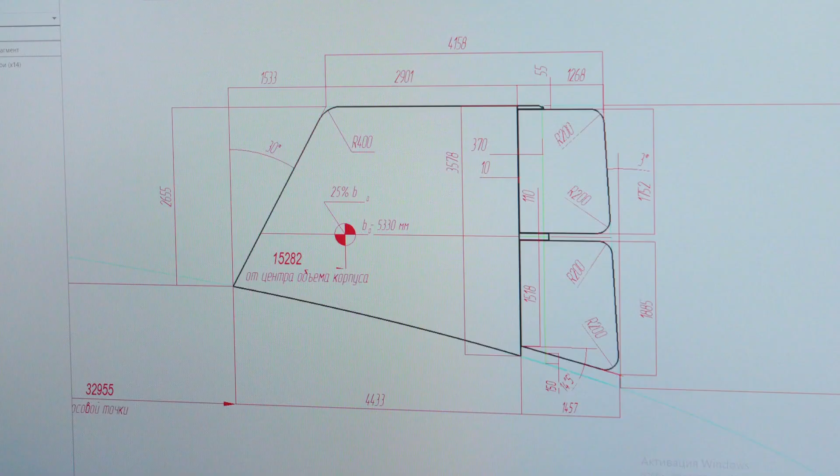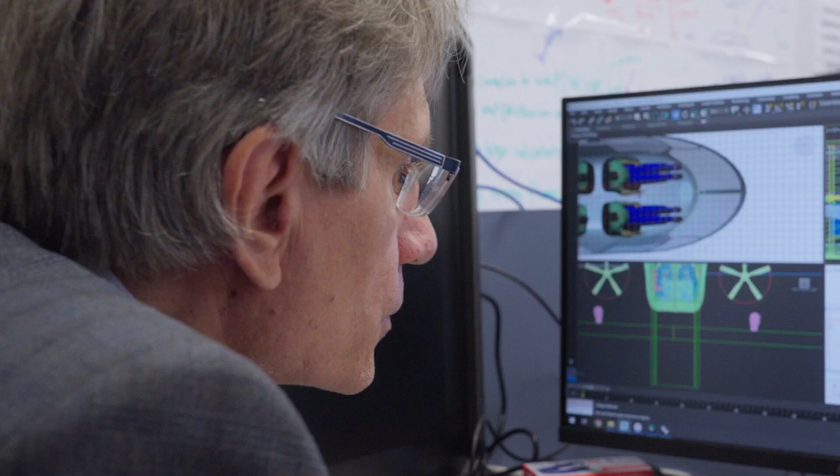Its main purpose is tourism, specifically sightseeing tours from the air. This could be of interest to investors. They can come, see it for themselves, and even try flying as passengers on this craft.

And in the unmanned version, it will be built as a prototype of a cargo airship, on which we want to work out the main issues related to cargo transportation. It will be designed to carry 500 kilograms of cargo over a distance of 500 kilometers. It will be possible to practice all the main operations necessary for this: mooring to a load docking mast, unloading, loading, takeoff, automatic takeoff, and automatic docking.

We are already starting to test all these operations on the unmanned vehicle, and then all the experience gained in the control system, how it will be implemented, will be transferred to the Nova 2 airship. The most labor-intensive part, the most important part from a design perspective, is the gondolas. We have finally settled on the basic dimensions, passenger seating, and the placement of doors and window openings. We are modeling all of this on a mock-up.

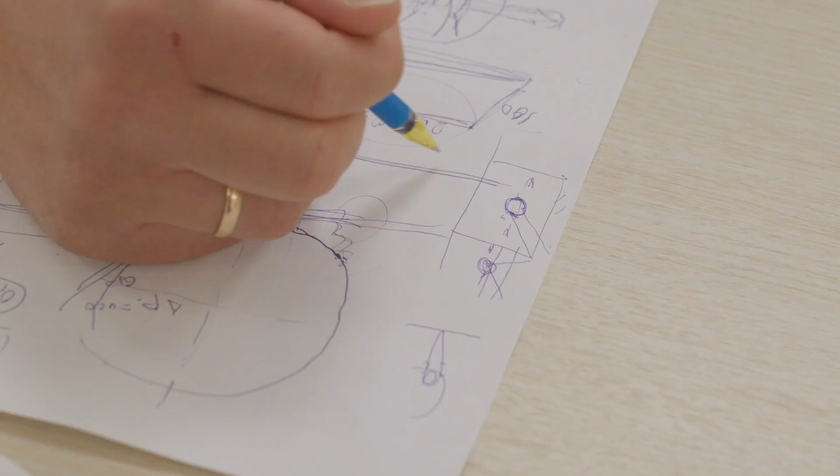Then, for a more thorough study of issues related to ergonomics, we will make a gondola mock-up that will be even closer to the real apparatus. At the same time, work is underway on the design, that is, its development, installing the engines, and selecting the materials it will be made from. We plan to actually start manufacturing this gondola physically around the end of summer.

Work on the envelope is also progressing in parallel. The material for the envelope has been purchased. Welding equipment and cutting equipment have also been acquired. In other words, this envelope will be produced right here at our own facility. And the other parts of the airship are also being developed: the empennage, the aft steering device, and the power supply system, because it's quite complex.

We have a lot of powerful electrical consumers. There will be 2 networks on board, a 12-volt and a 48-volt system. Work on the VGS units is also ongoing in parallel. And of course, we're waiting for the engine to be on the test stand so we can start it up and see how it performs.

We have a rather complex transmission system there. From a single engine to a gearbox and angular gearboxes, we distribute the torque to 2 propellers. The propellers themselves are not simple either. They are ring propulsors, which allow us to generate lift while stationary, making takeoff and landing of the airship much easier.

The Nova 2 airship will be another milestone in the development of Aeronova's aeronautical technology, because it's the first manned craft that we will get airborne. This is a step towards creating larger airships, both the Nova 8, which will have 19 seats, and the Nova 35, which will have a rigid frame. So we're moving in that direction, towards building big, beautiful airships.

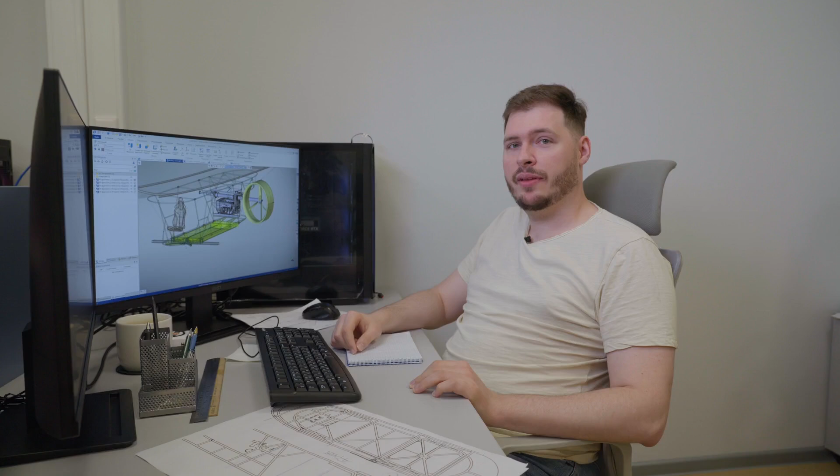My name is Dimitri. I'm a design engineer at Aeronova. I'm working on the Nova 2 project. I'm assembling the overall look of the gondola, meaning I'm putting all the models together. This is very important work. I'm also working on designing the suspension system that connects the gondola to the envelope.

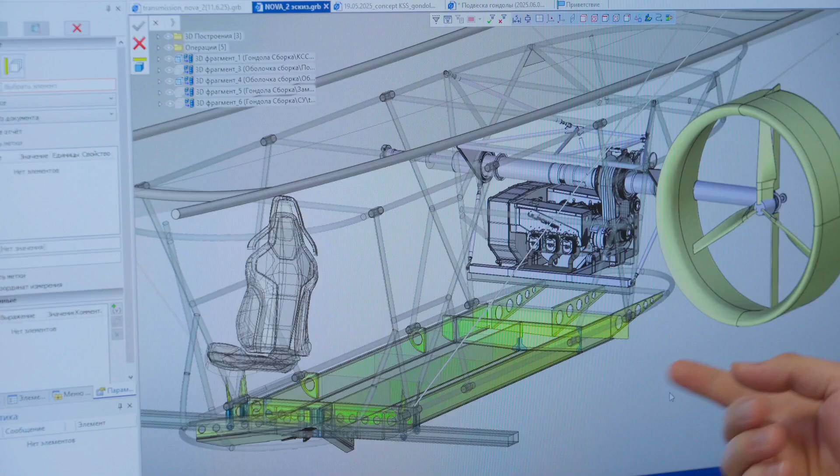Right now, we're developing the structural layout of our gondola. This is the gondola's load-bearing frame. It's made from aluminum profiles. Simply put, this is the skeleton of the gondola. We're laying out the ribs and considering where all the different structural elements will go. Here, in fact, is the engine placement.

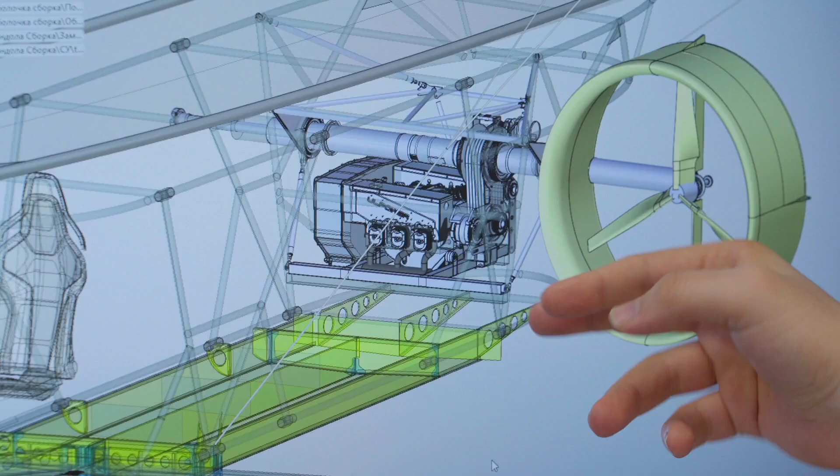There will be more seats in front of it, a whole row of seats. And because of that, we need to figure out if we'll be able to reach from above. That's why we're making a mock-up of the engine out of foam. And we will carefully place it within our gondola model so that we can accurately figure out the most optimal way to effectively service it.

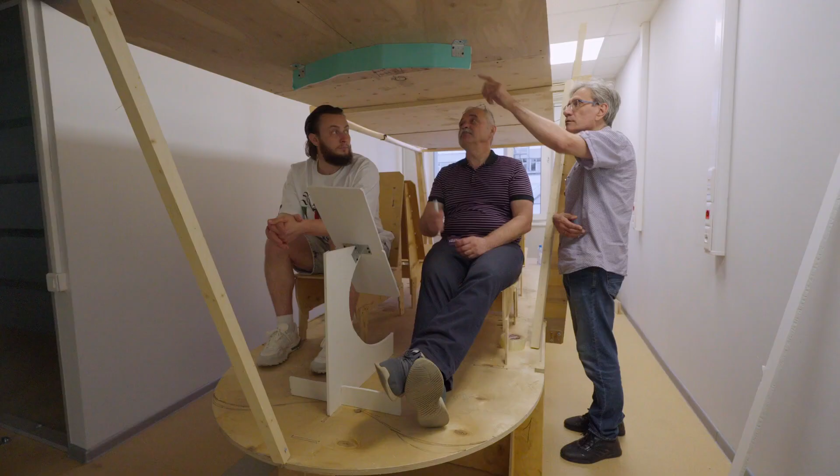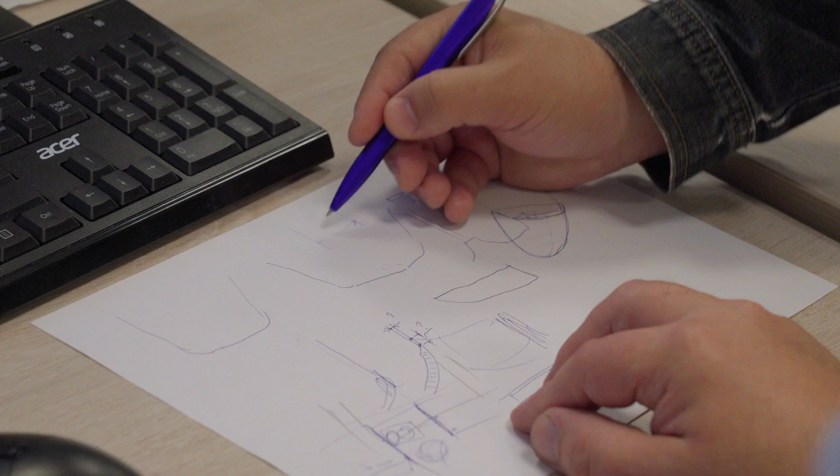My name is Vitaly Ivanovich Tyran. I'm a design engineer. I'm working on designing the gondola for the Nova 2 airship. We built a plywood model of the gondola to check the arrangement of the seats, the passengers, and the convenience of boarding and disembarking. At this stage, we're coordinating the structural elements that were developed by other designers. For example, the propulsion system, the landing gear, the nose section of the gondola.

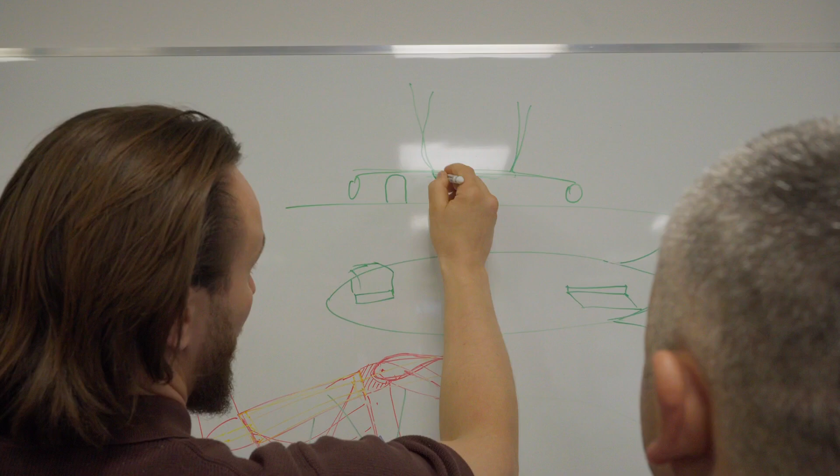It's a long and labor-intensive process because each designer has their own vision. The art lies in bringing all of this together so that it becomes a single, unified, and indivisible structure. This is how the design and a magnificent airship will come to life, one that will amaze many people.